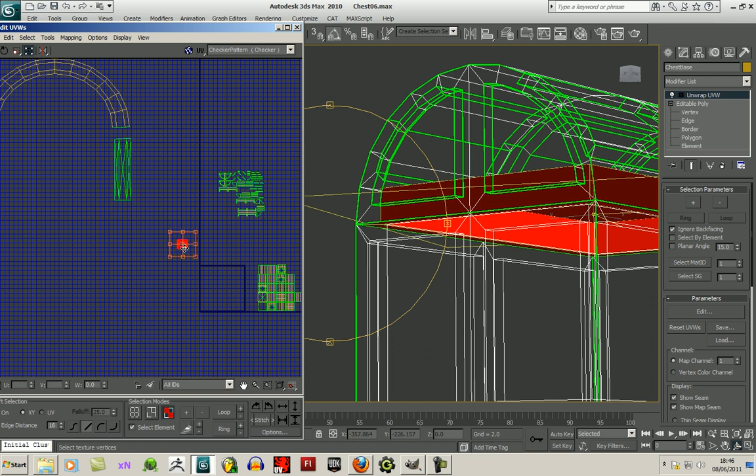Okay, welcome back. I was talking about this problem here with all these green lines, which means none of these are welded together. So I'll do some box mapping on them again. Move these up here because they've still got to be worked, and move them with these guys because that's been processed somewhat.

Anytime you do any of these kind of packing methods, they will all get put into this little box here, so you want to keep it free. I'll just do some normal mapping, box mapping. I could get away with doing back and front mapping actually, or would it be left and right mapping?

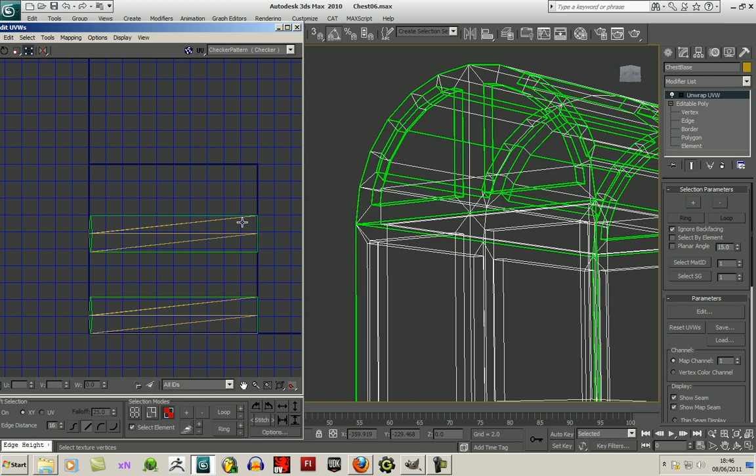That's a bit of a mess as well, so I'll do my usual normal box map. Select them, and then pack UVs. That's my two favourite things to use, normal box map and pack UVs, and as you can see it's a little bit better.

Still all these triangles everywhere because of basically the way I'd made it. It split it into triangles. I can see these edges light up here, but...

I want to bring all the edges relevant to each other. That edge up there, that edge lit up there, nothing lit up there. Choose this one. Yep, okay, that one. Let's do that one. That one there, and that one there.

Okay, back to this. Control T, or right click and choose weld, target weld, and bring these to meet up with its little lit up body.

This reminds me of doing dot to dots when I was a kid, so it's a little bit therapeutic. Dot to dot, dot to dot. Okay, fun and games. So Control T to come back out, and I can straighten these up.

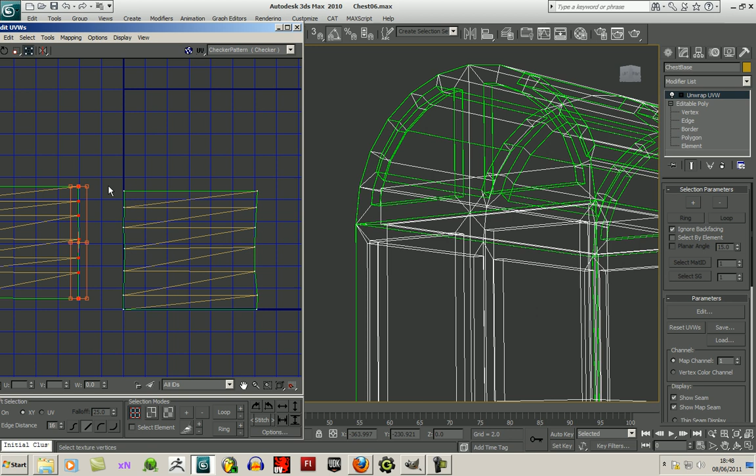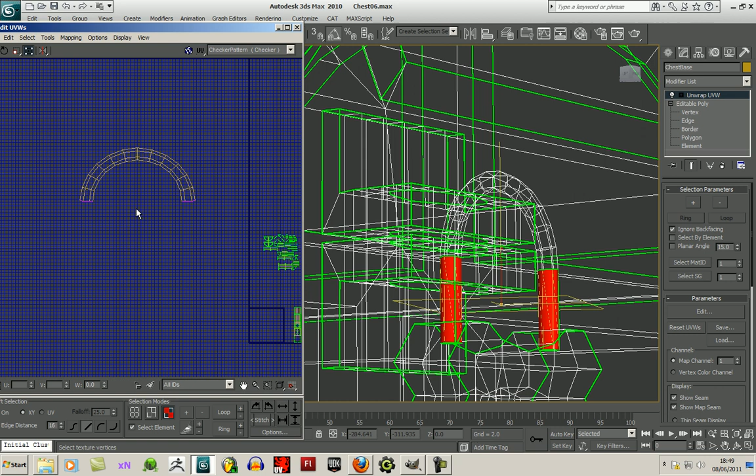Okay, so these have been processed to a decent extent. That's the two bar bits of the padlock. This here, I could pretty much leave as it is. It's the same on the other side, but it's so small, it's irrelevant.

Same with this, I could probably take this element and fire it over that one, but I don't want to do that. I'll keep those separate. Yeah, I'll just keep those separate. This one is fine.

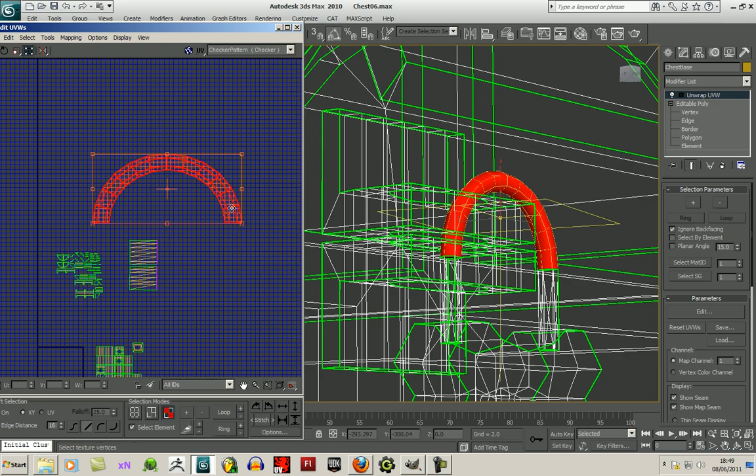Sometimes these kind of ones are a little bit hard to unwrap. I could pelt it and things like that, but I don't find that a very good method all the time. These are obviously methods that I'll be taught in the course, methods I'm not really used to, so I'll just stick to my cumbersome little methods here.

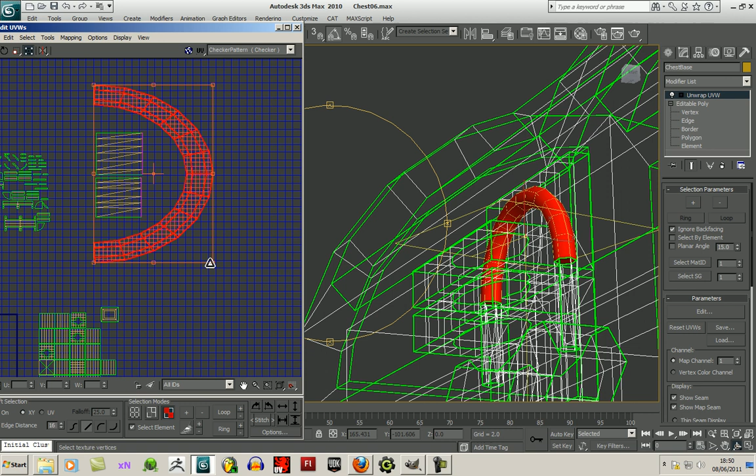Okay, so the rest of the model has to be processed here. We've got all these faces and things to put together. I want to put these inside the relevant parts.

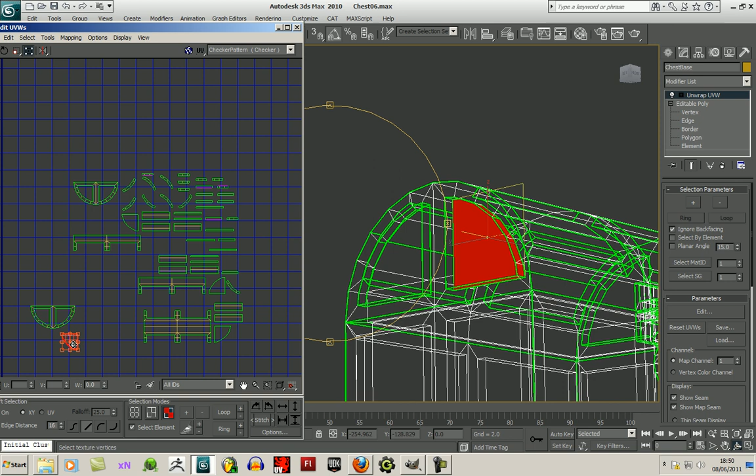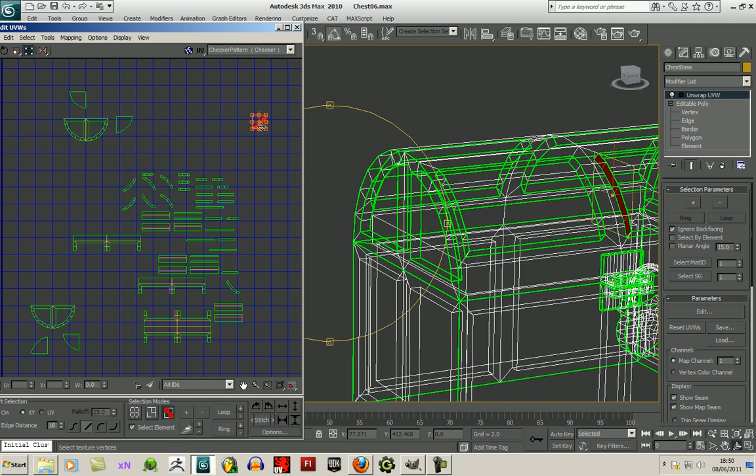Looks like that one, that's that one, so that's part of that. That one there, that's part of that, so is that one. Some of these edges here, that's part of something else.

Back. Okay, you will start to see it come together eventually, but it does take time. So I'll have that. I'll have that. I'll rotate that one round.

I could actually go ahead and start to select faces if I want. I can see that there. That's part of that. I just want to see what edges light up when I select this. Okay, those edges, so I don't have to flip that one round or anything. I just want to bring it into place.

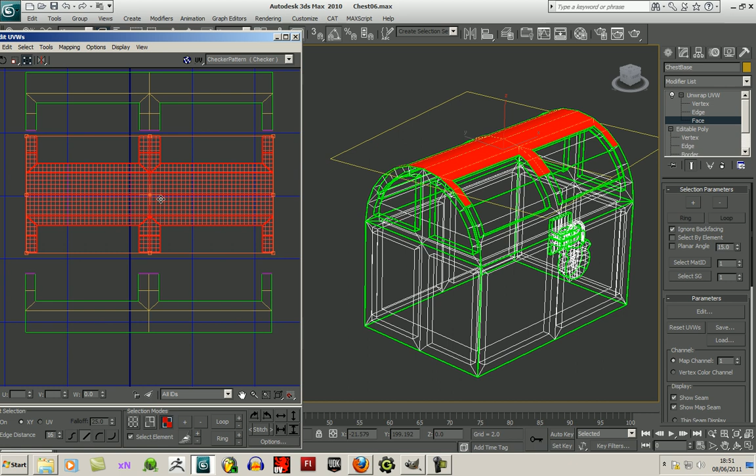I can't weld for some reason, it's not working. So I'll do it this way again.

I do this kind of thing with lots and lots of models. It takes time to do good UVs, and the more you do it, the more experience you get. It's a tedious thing, but it's got to be done.

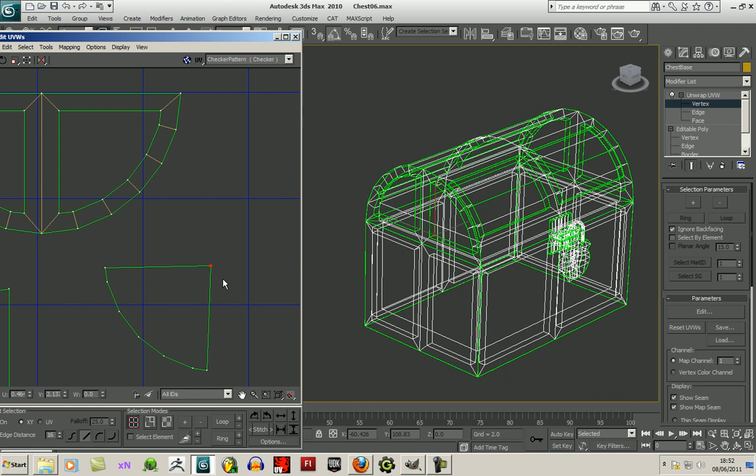So I want to weld these guys up, but these don't weld up with these. There's a kind of inset part that welds up first, so that's what I want to find. Find all the bits that are curved like that, because they'll be part of one of these guys.

I can't see anything lighting up at the minute. Oh, there we go, there's one lit up. So it's these little straight ones, I think. Yeah, there's one for there. One for you. One for you. One for you.

I know what you're thinking. You're probably thinking there's got to be an easier way of doing this. There probably is an easier way, but I just can't be bothered trying to find it. The amount of times I've tried to find an easier way has made it harder.

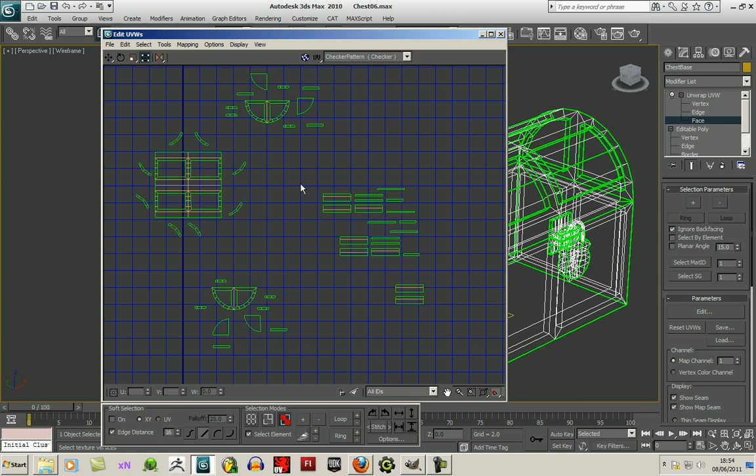It does get a little bit complicated. This is my easy way, this is my only way. There's so much software that can do this for you. There's software called 3D Coat, which is quite good for getting your UVs right, but I won't be using that. I'll be using very traditional methods. I'm more of a traditionalist kind of guy.

So before I sort all these bits, I want to get all these edges in place. This is like the extruded edges, and all these welded up.

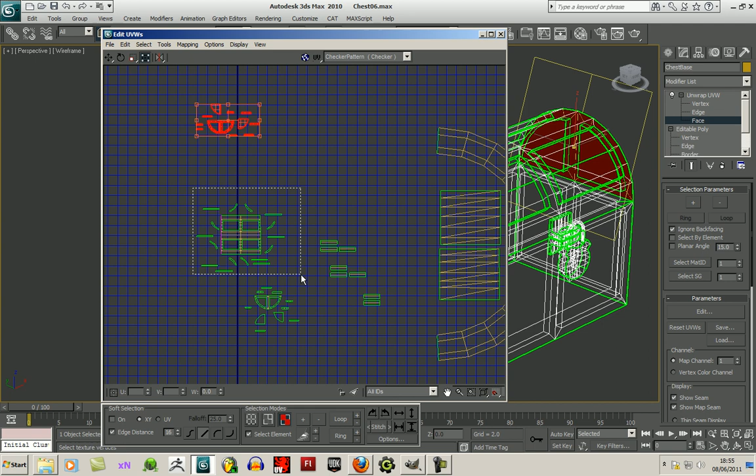So I'm just putting them next to their counterparts. Whatever lights up purple, I'm just moving it over so I can prepare to weld all of them, all the bits together. Could be running out of time now. No, still got 5 minutes. So yeah, this group, and this group all need processed.

So I'll back into this mode, select the element off, and if I choose this edge, I can see where it links up. It only links up to this one so far. So I want something that links up to this group here. There we go, so this lot goes up here.

Control T, and I'll connect them up to their counterparts there. And that's the little inset part, which will need textured, so I'll give it a little bit of UV space.

This kind of is like a little game, a very old little game, where you just connect the dots, connect the dots, connect the dots. 500 points. 10,000 points. Yeah, it does get a little bit sad.

I like to straighten these up a little bit as much as possible.

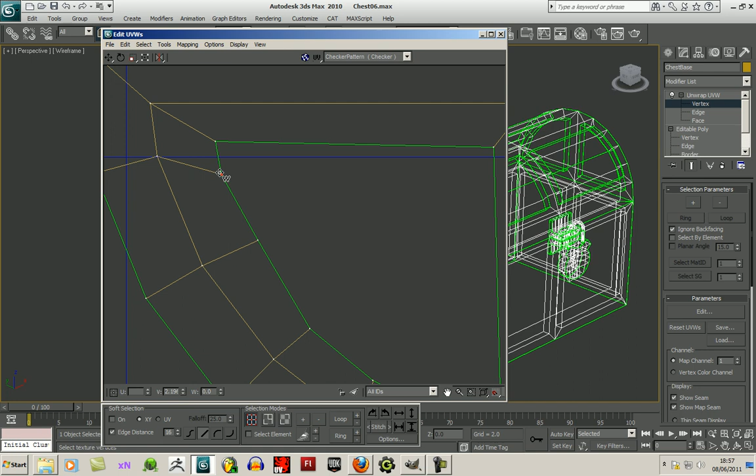And this is the reason why not a lot of people like doing UV mapping, because it takes so long. But if you start at the deep end, it only gets easier. So if you call this like the extremity of UV mapping, then any other method will seem either worthwhile or easier.

I can think of quite a few methods that are easier, but not as good as me making it exactly the way I want it. Because at the end of the day I'm going to draw on these, so if I get them nicely placed, then I can draw on them a lot easier.

And yeah, I think I'm running out of time. I have just over 2 minutes left of this video, and it's a very detailed video. It's a very time consuming little process, but worthwhile, really worthwhile.

Oh, I can't wait to do this course now. I bet they've got a method that's so much simpler than this. Maybe even guys that have had a bit of trouble doing this kind of thing are thinking, what the hell is he doing all that work for, when he could just pelt map or something.

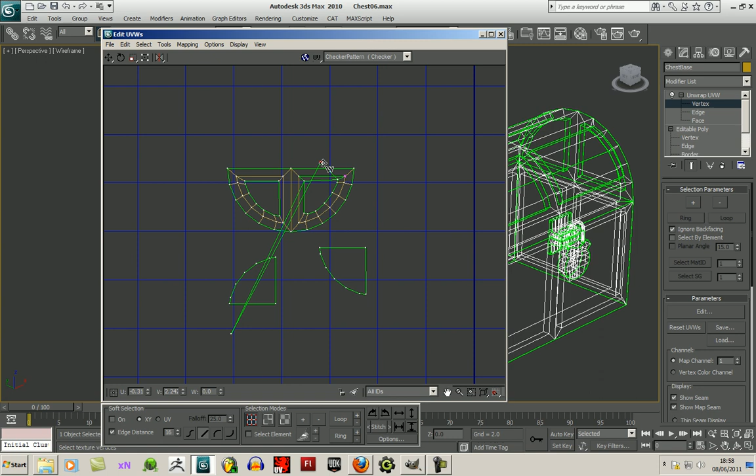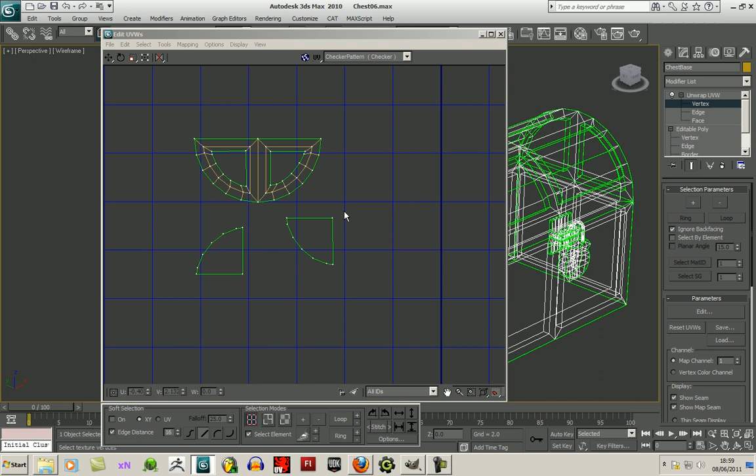I had a little go at pelt mapping and I really didn't like it. For some reason it went crazy. I didn't know when to stop it. I still had work to do at the end of the day, I still had to fix things and straighten them up and all sorts. So this method that I use has got the most control, and I am not really fussed that it takes too long. This way I'm happy.

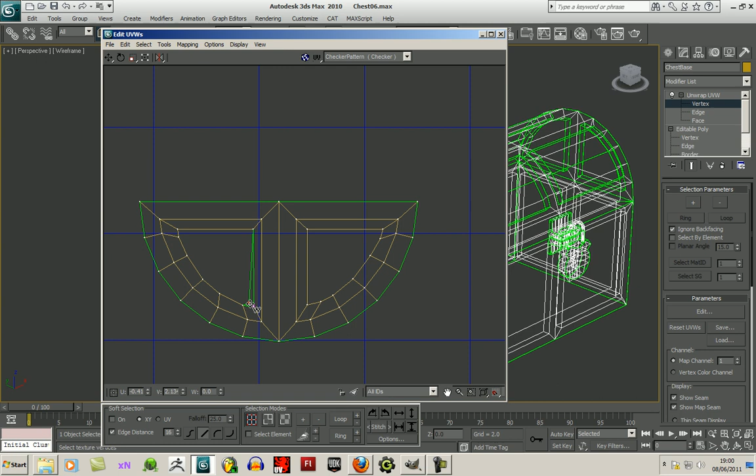So Control T toggles between weld mode and normal, the default mode. And I'm just welding whatever lights up from the one I select to whatever one lights up, and that little green line goes away. Oh, and that's my call for this video to end. Next video I'll do this group and this group.